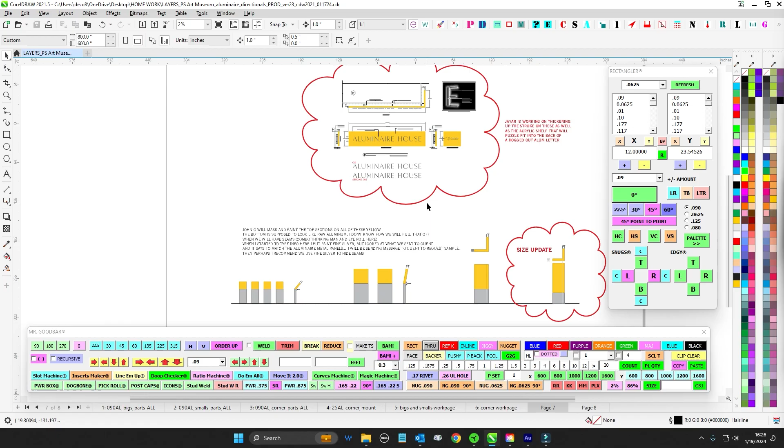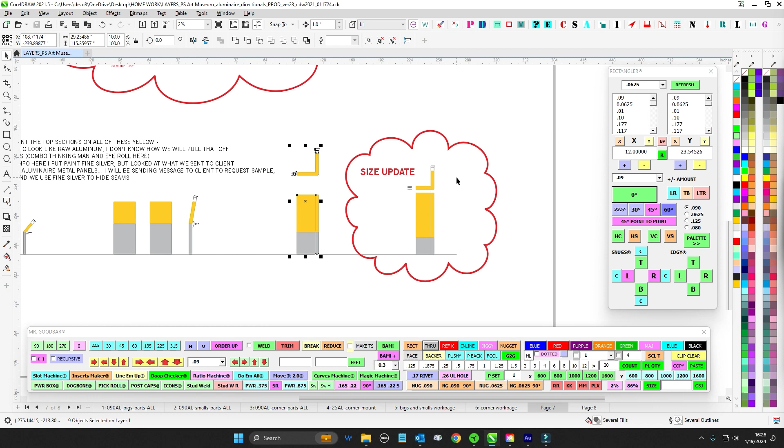So you got these little small guys, you got two mediums, and then you have this corner size here. That in the 11th hour got short, sort of skinnied up, but raised taller. So that's all been updated.

So we're all good. So I'm calling this one the corner just because it has a hard 90. Whether it goes on a corner, I'm sure it does because it's got two sides. And then you've got the bigs and the smalls, the biggie smalls. So I went with the G out of bigs.

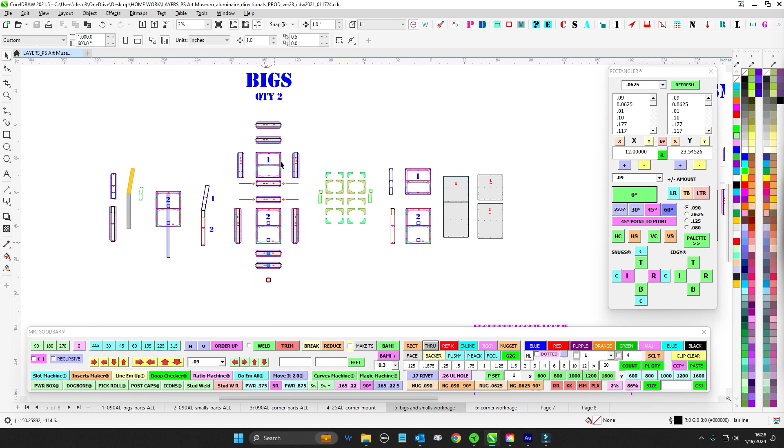So there's two of these. So all the parts with the G on them, that's for the bigs. And then, yeah, everything with a C is for corner. And then everything with an S will be smalls. So just look out for that. So with that being said, let's get after it.

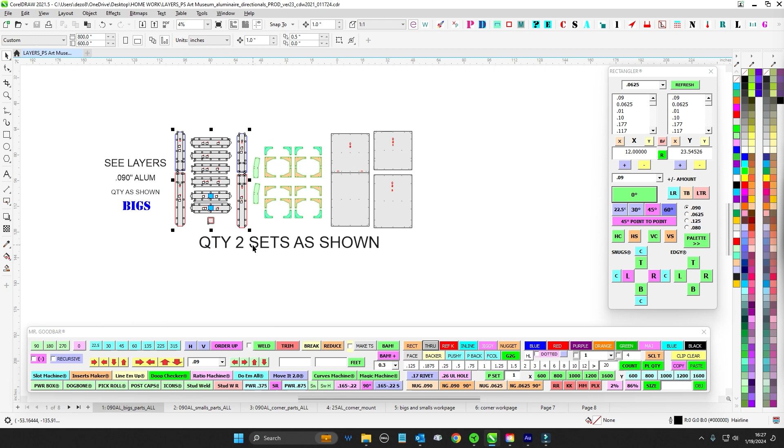So we got the lay of the land here, so stuff fits on one page. It's all good. So you got the frame pieces for the bigs. You got your jigs, and then you got your front skins and your back skins. There's quantity 2 for those. And then we have quantity 4 here.

So you've got your smalls. You got the jigs and everything good to go. You got your front skins, back skins. Do 4 of those, good to go.

There's only one corner, obviously. So you got everything you need for the frame. Got your skins, back, front. And then you have your jigs. So that's all good there.

And then the corner will sort of have like a little modified Mjolnir. It has a removable bottom post. So you'll have everything you need there. That should look pretty familiar.

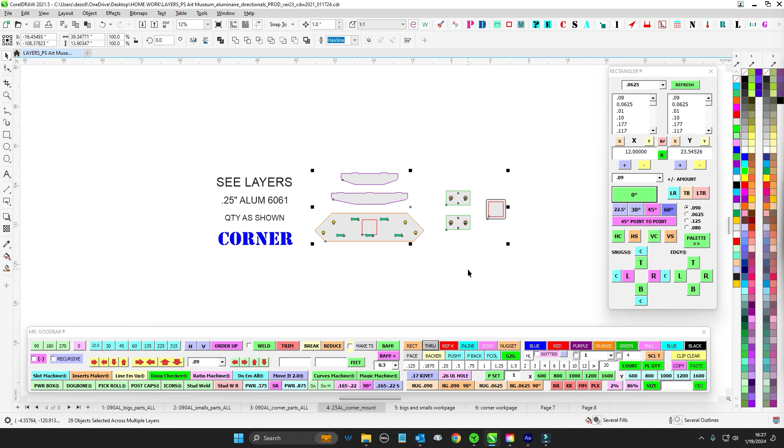So now let's talk, we'll start with the corner. So really kind of think Charasso corner frame, but a little different because the Charasso frame couldn't have any structure inside of it. So this is the opposite. We've got ourselves structure, so it's a little easier to make.

But essentially what you're going to be making is like 2 separate frames. They're roughly 3.5 inches deep. They're 3.5 total with the skins on. But basically you're just going to put together these 2 frames.

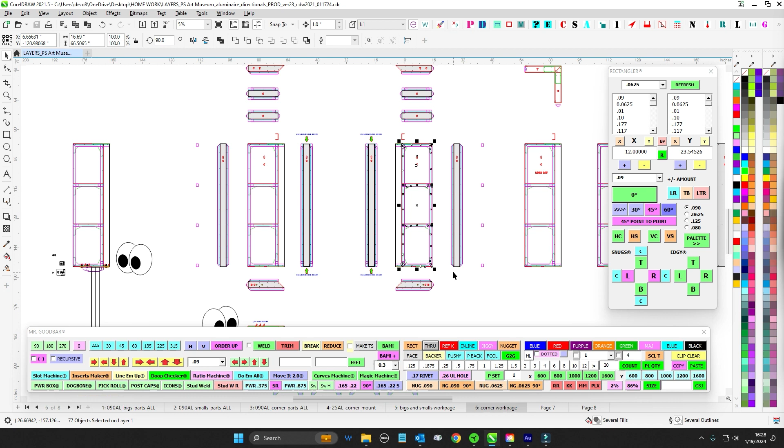And the only thing that will be different about the frames is that they'll have just this front part that sticks out. So this part here will be like a standalone frame. And then you're going to make another standalone frame.

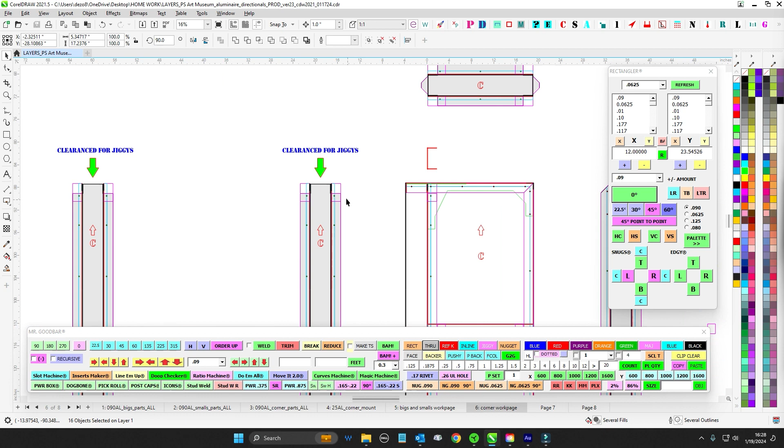And then the only thing that's going to kind of come together is the jig is going to slide into both of them. Haven't quite done this before, but so I clearanced these 2 verts right here to allow that corner brace to work its way into both of them.

Then you can see here in the green, this is where that brace or the jiggy comes across. So you'll be able to tack that to that jiggy. And then the jiggy is essentially going to hold them together semi-temporarily.

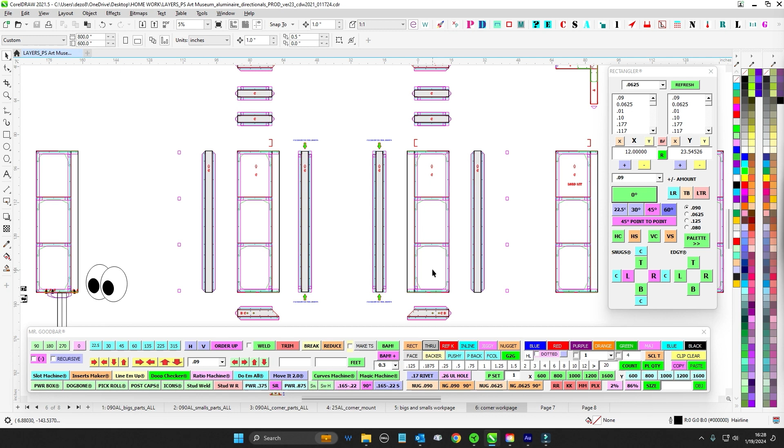If you want to throw some tacks on the inside where these 2 come together, you'll see these frames touch. If you want to throw some tacks there, sure, just to help align it. But also what's going to happen is once the skins go on there, it's going to help kind of hold it all together. But you might be able to just run your gun down there and just go on that 90 all the way along if you want.

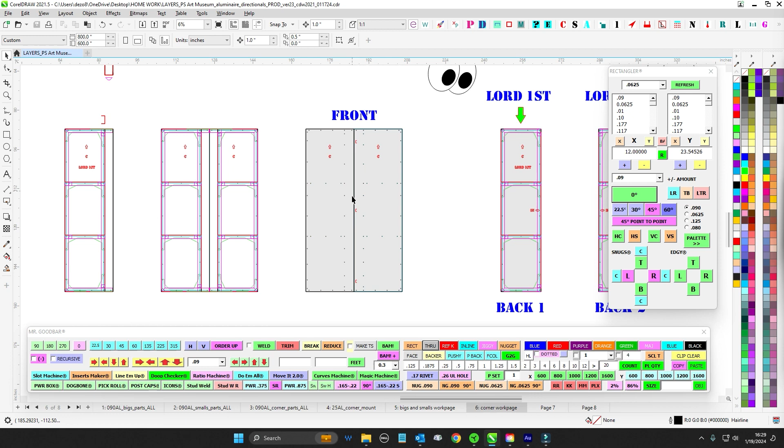But once you have it all together, then it's just going to be a matter of putting your skins on. The skins will do all the work, because we're going to be able to fold and bend this as one, and that corner will be nice and strong. You're not going to have to mess with that fiddly stuff like you did with Churrasco.

The reason why we had those fiddly corner pieces like here and here, they had the Lords, is because we had no structure. So that was literally all that was going to be holding it together until we got the faces screwed on.

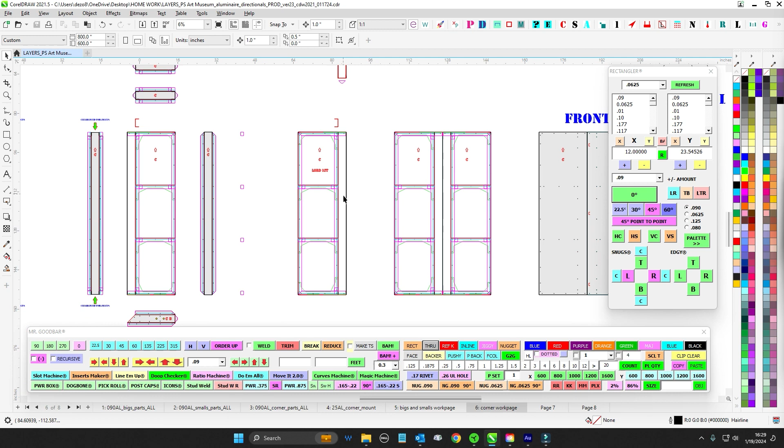But because the face is going on in one piece, it's going to be a little easier. So you're going to have just kind of a front cavity here. And then once you get that, you're going to Lords that on there, and it should be nice and strong.

Now the face, go ahead and lay it on, you're good to go. When it comes to the backside, you do need to follow - I have the Lord 1st and the Lord 2nd. The reason why is that these skins are going to be tucking into the back corner into each other. Now if you were to just have them bonk like this, there's a chance this doesn't meet up right and you could kind of tell.

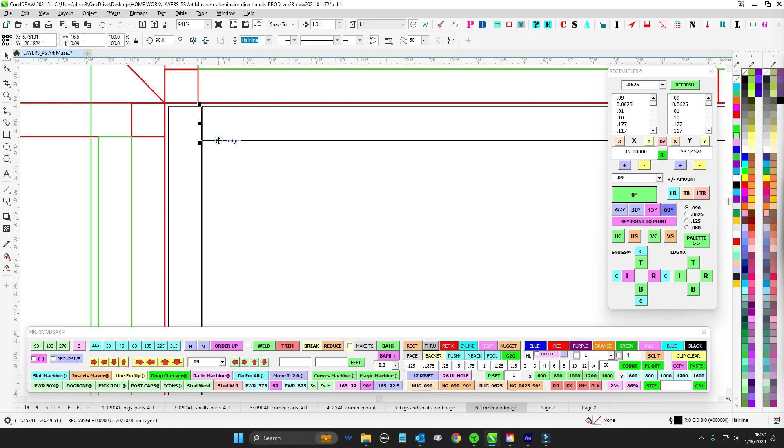So anytime, and you can take this like when you're cutting trim and baseboard around your house, anytime you come to a corner like this, you want to cope it. So you want to make sure one goes long, the full length, and then you butt this one up against it. But the only thing is you got to make sure you do it in the proper order, otherwise you're caught out, so let's not do that. So that's the only thing - when you go to put these on, look for the long one first, it's literally an inch longer, then its buddy.

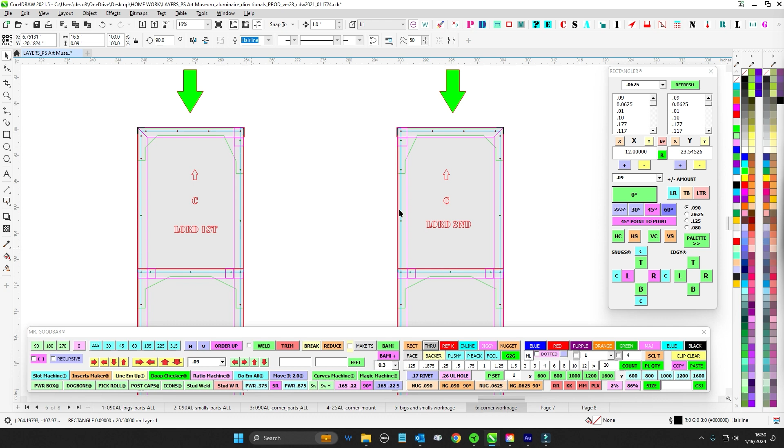And then that one comes on second and that's going to tuck in, and this guy's going to win - this guy's going to be the submissive one, you know what's up. So you got them in there, make sure they go into the corner. It should be good to go. Getting a little ahead though.

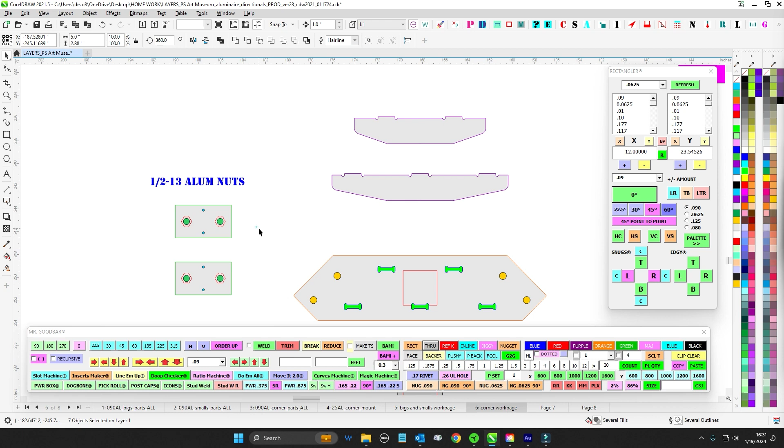You do have some 1x3s, so you're going to just do like we're doing right now with the big Riverside Fairgrounds piece. You're going to do a couple of these, some inside rivnuts or weld nuts, half inch weld nuts - those go inside the 1x3s. They do fit just right in between the jiggies.

So you don't weld the jiggies yet - get it all put together, get this thing welded up, put it inside the 1x3, and that way you can weld it to the jiggies and you can actually weld it to the base as well, so you'll have those two.

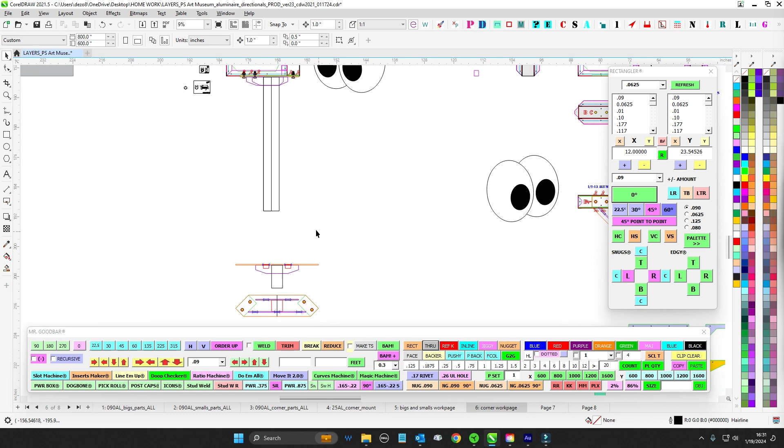Those guys go inside and then they will match up to our kind of modified Mjolnir plate. So that'll be that - you want to do that first, got a little ahead, then you do your skins last. But pretty straightforward there.

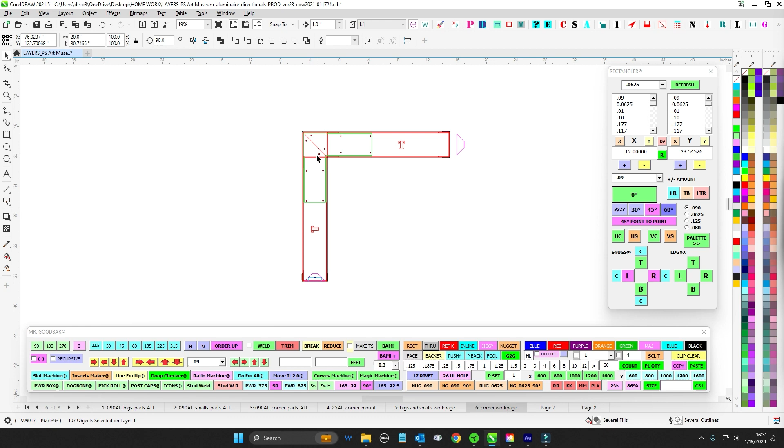But again, you're just going to start with two separate frames and then bring them together. Now I don't know if you're going to be able to slide this on with this jiggy, so you might be able to assemble it with the jiggy sticking out and then bring this in. Or you might have to create a ladder frame with the two braces and these two guys, and then these two top pieces here, you might have to cleco them to the jiggy and then bring that top piece down. I don't know, so you'll have to kind of see how that goes together.

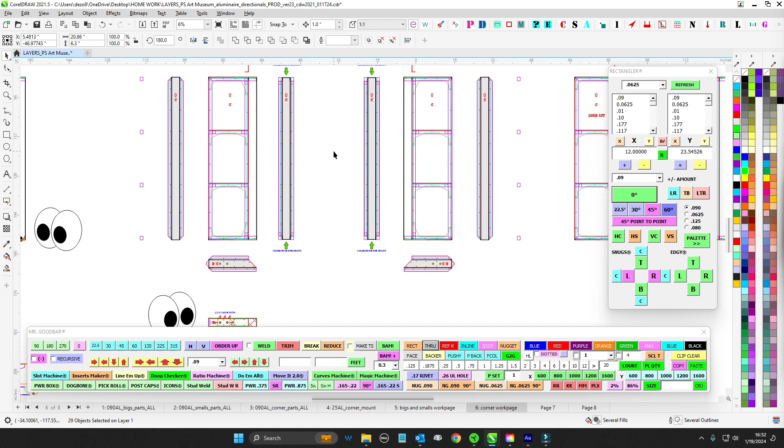It's a little different than what we've done in the past - well, it is the future. So anyway, just look for that, look for bottom, look for top, make sure you don't get them confused. So that's going to be the corner - that's it, weld that up.

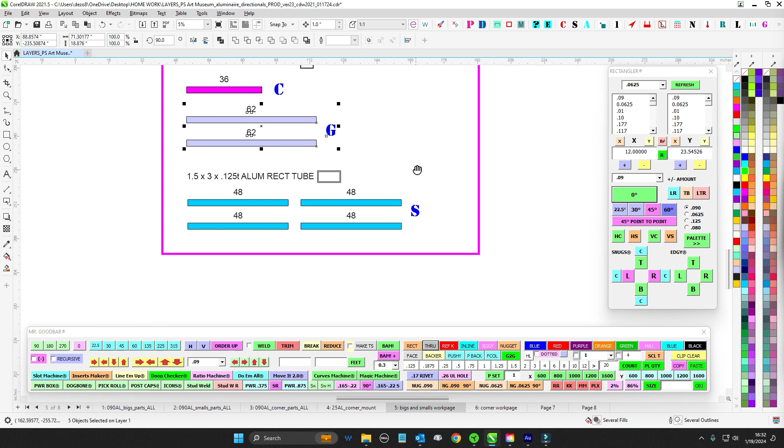I do have a cut list for all three. So you have 36 for the corner, you have 62s - that's 3x3 for the two bigs, and then because the little guys are so much skinnier, you're going to have 1.5 by 3, so you're going to have to raid your bighorn stop sign stash. And you've got 4 48s.

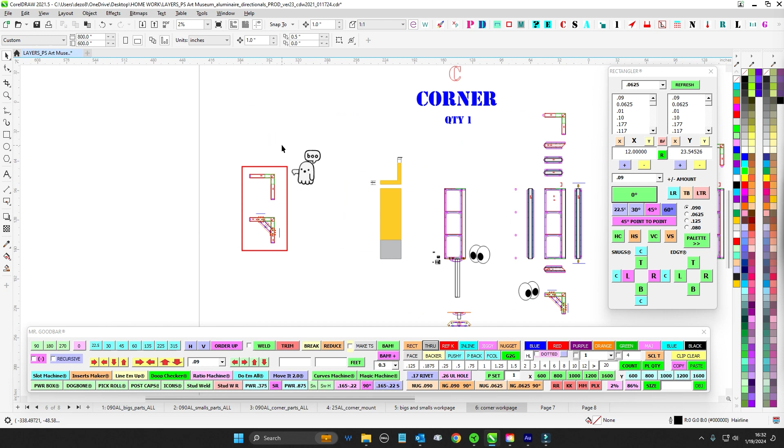So you're just going to burn that 36 to this, and that gets set aside, you're all good to go. So that'll be corner, boom. This was the size of it before - just ignore that, I didn't want to get rid of it, but it's shrunk by 4 inches on both sides.

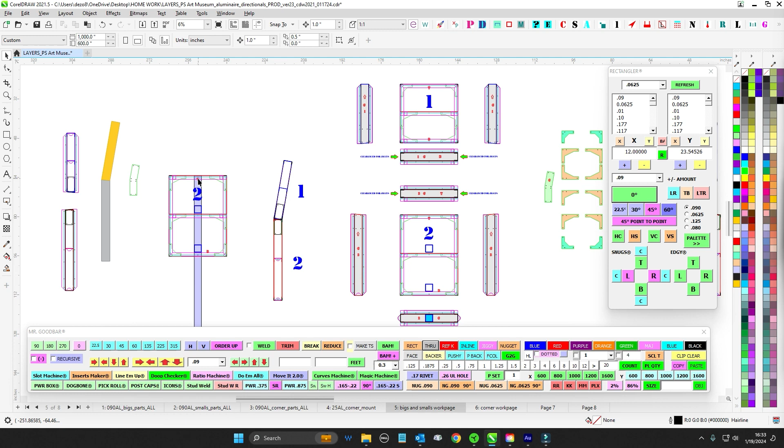Now the bigs and the smalls are essentially - you can see here where this is like the top view, and this jiggy is 90 degrees. So imagine just stretching this out and only going to 10 degrees, except instead of top and bottom, it is now the top of the corners would be now the sides of this guy. So you're still going to end up with two frames, but instead the frames are going to be the top and the bottom, not two frames that come together to create a corner.

So I call these the 1 and the 2 - the 2's on the bottom, 1's on top, and that way you kind of know which parts go with which. It's going to be the same system, except the jigs are going to be on the side now instead of top and bottom, but it's the same thing.

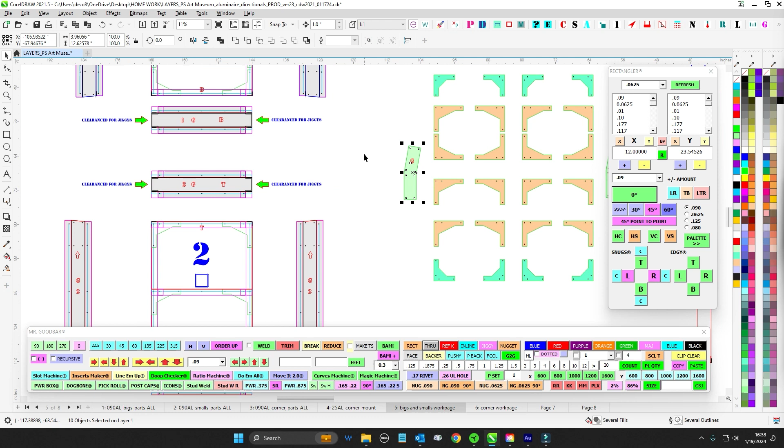I clearanced these guys in order to allow that jig to work its way through the bend. So you're just going to go ahead and make two frames that are separate from each other. I wouldn't weld the post in yet, but get all that taken care of, and then you'll just have this little bit sticks out, and the jig will hold this together.

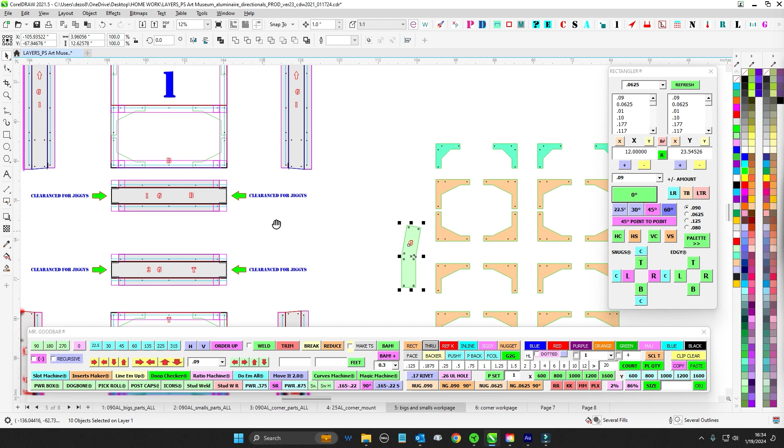Not sure if you're going to be able to get your gun into this little pocket here. Not sure if it's necessary. I wouldn't worry about it too much if you don't have to.

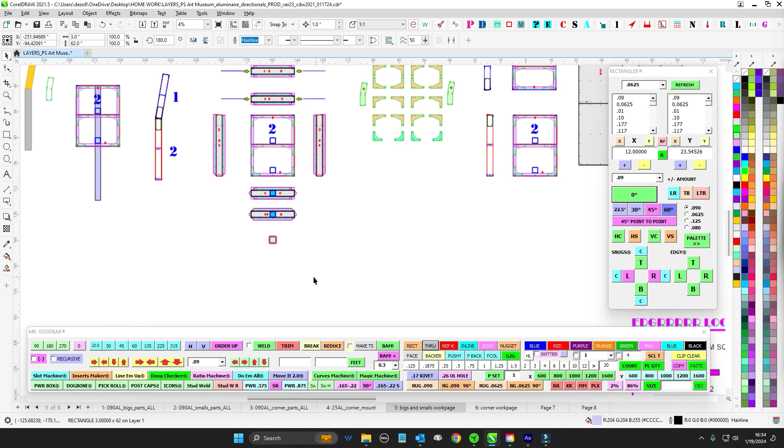Then once you get the jigs in there, get it all tacked to itself. There's no quarter inch or anything in this one, nothing funny. Then you're just going to take your post, slide it all the way up, bonk it, and tack it in nice. Make sure it's nice and strong. Good to go. I'm giving you an 09 cap as well, so cap it up.

Jim made the comment that these will be kind of in public. People might sit on them, people might act a fool. So let's make sure it's burnt nice, get it burnt up the top here. And hopefully we'll dig a good footing because they might have to put up with some shenanigans out in the public. So we'll see what happens. But anyway, you want to make sure they're nice, built strong like that.

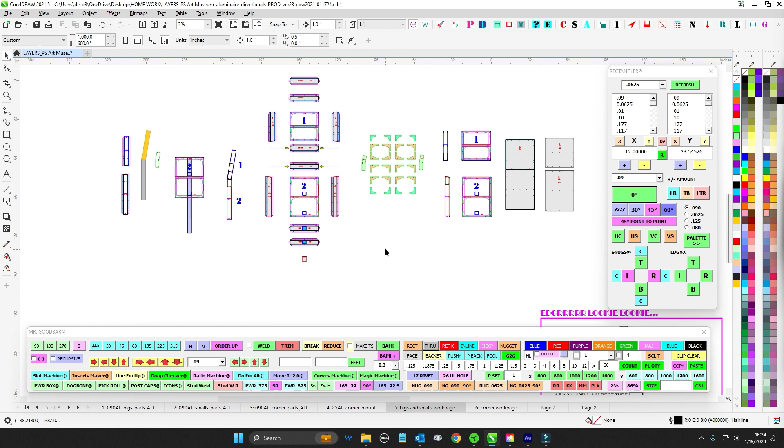So top frame, bottom frame, jigs hold it together, tack it all together, throw your post in there, burn it up. Then same thing, you're just going to bend.

The front will be one piece, so there's no seam. So make sure you got your clamp on one side, clamp the proper side, get it to bend to 10 degrees. This is a 10-degree bend.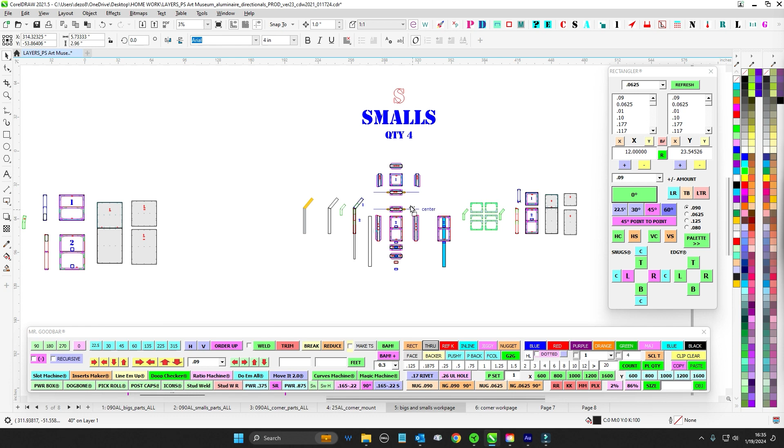And these are 40, 40. Real time, baby, real time. There you go. All right, so that's what you want to bend that skin to. It's 40 degrees and 10 degrees. We got to make a match.

Come on now, we got 18, let's give it a 20. There you go. All right, so there you go. So that's it. So you want to bend this to 10 or a little more, just right.

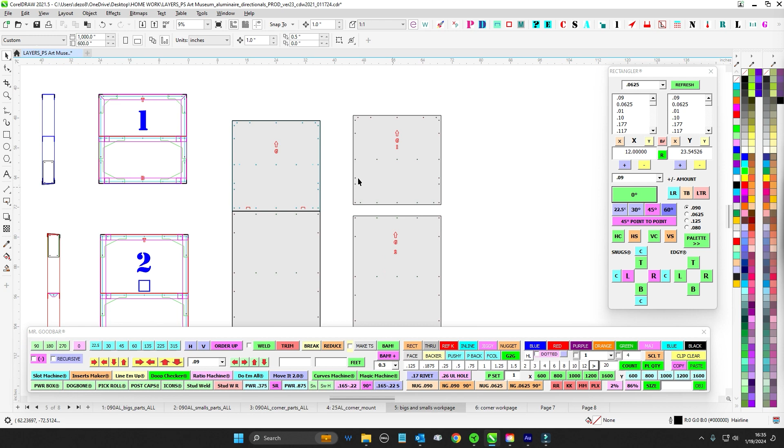So you can just put them in any order, but I would make sure you get a little bit of squish inside there to close up this little air pocket you're going to have when you bring these two skins together on the backside, and then just do a scrape party. Make sure it's scraped clean. So that'll take care of that.

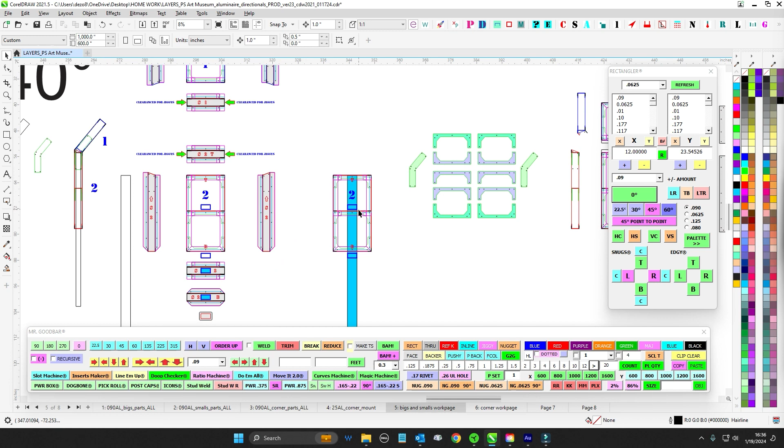So you got two of those, get those nailed down, good to go. You got four, just a lot smaller, because it's skinnier, these are only 2.5 inches. So this is 1.5 inches by 3, posts to slide up, but same thing.

You're gonna have yourself a separate little topper, you're gonna have yourself a separate little bottom, and then bring them together. You can see the angle's a lot more pronounced, so maybe you can get your gun in there if you have to. Again, I don't know if you'll have to. These are pretty small. And then get your jig in there.

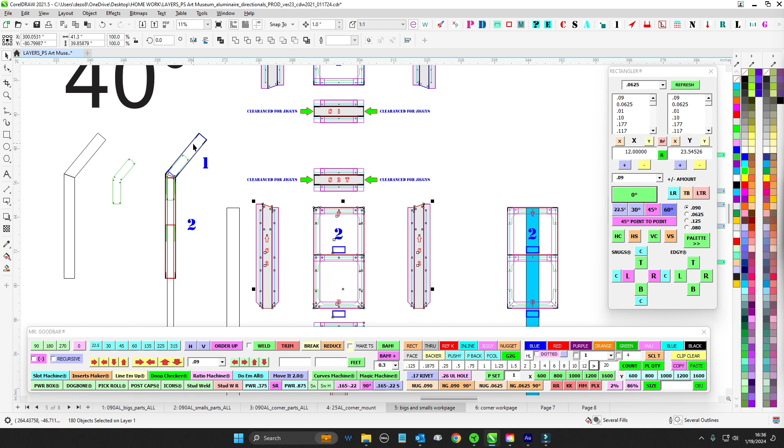And then doesn't matter what order for the backs, just make sure they're all good. So you got four of those. And so that's pretty much it.

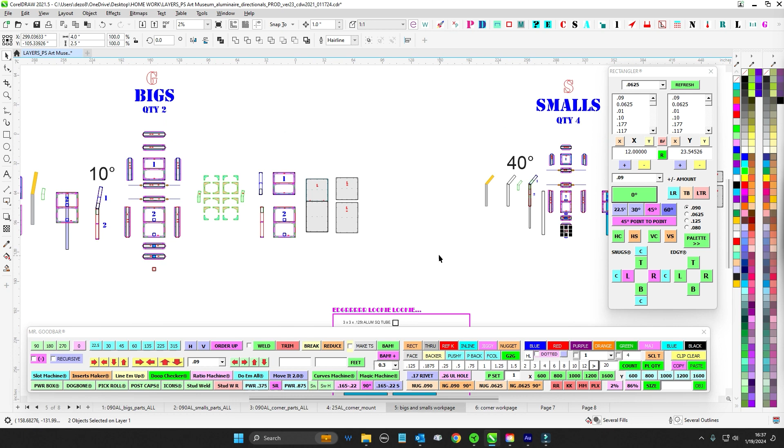I just wanted to get these cracking, but I just wanted to point out a few little funky things to them, but I think you guys got these down. And like I said, illuminated, I'm going to be working on that tomorrow. Get cracking, that's on deck, so be prepared.